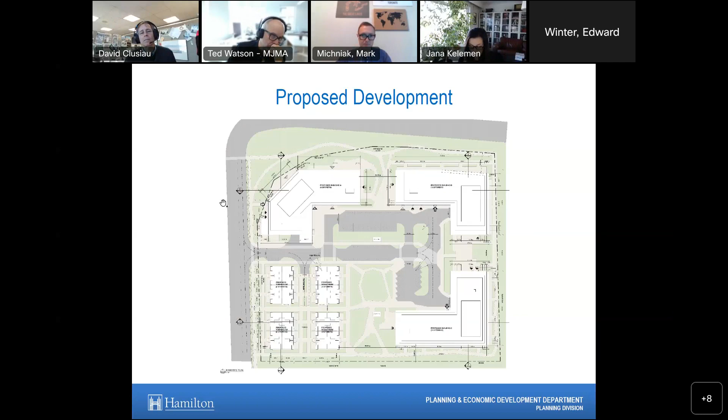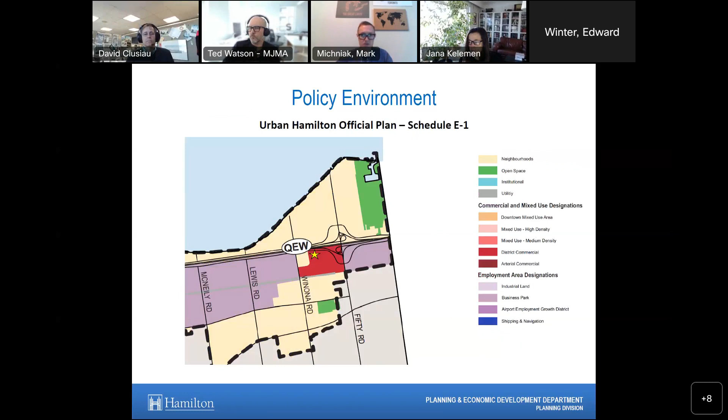Now I'm going to go through the policy hierarchy for this property, starting with the official plan policies. The subject site is designated neighborhoods on Schedule E of the Urban Hamilton official plan, and is designated district commercial on Schedule E1 of the official plan. In addition, this site is located within the Winona Fruitland secondary plan and is designated, again, district commercial.

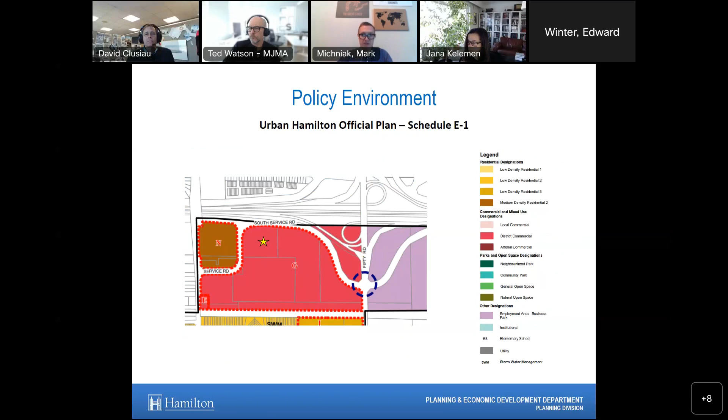District commercial areas are intended to serve the daily and weekly shopping needs of residents in the surrounding neighborhood. They serve as a focus for adjacent neighborhoods by creating a sense of place. And as these areas expand and redevelop, they are anticipated to create an improved street presence by bringing the stores up to the edge of the street.

The urban design policies in the secondary plan promote, among other priorities, attractive pedestrian-oriented environments, high quality of design, compatibility between land uses, and the protection of escarpment views.

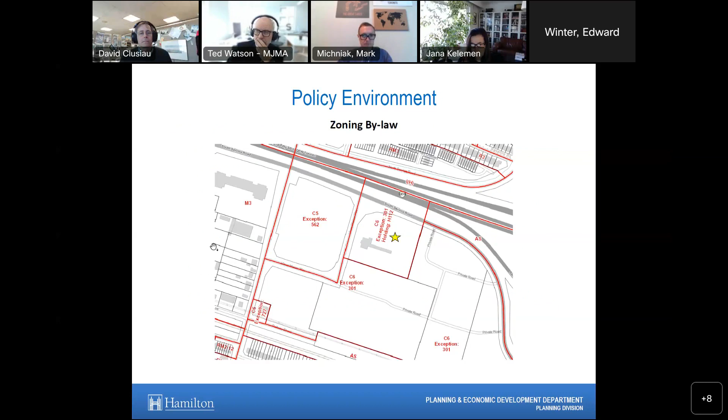Staff would ask the panel to consider the following areas of discussion when contemplating the design proposal. Is the proposal compatible with and does it enhance the character of the existing environment and locale? Does the proposal organize space in a logical manner through design, placement, and construction of new buildings, streets, structures, and landscaping? Does the proposal create high quality, safe streetscapes, parks, and open spaces that encourage physical activity and active transportation? Does the proposal contribute to the character and ambience of the community through appropriate design of streetscape and amenity areas? And finally, does the proposal respect prominent sites, views, and vistas in the city? Thank you, and that concludes my presentation.

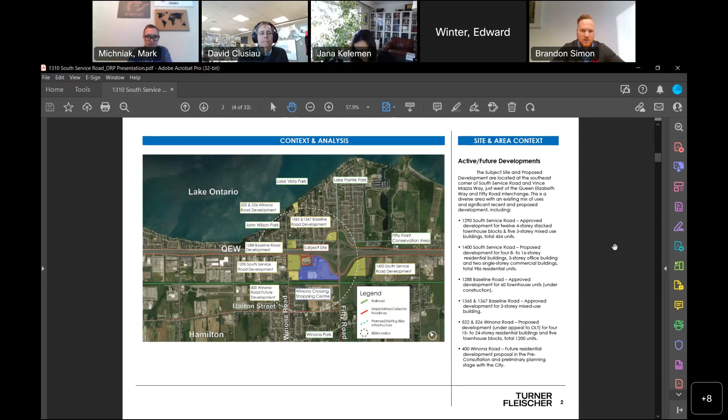400 Winona Road, just to the southwest of the site, is actually owned by the same owner as the Winona Shopping Center, but is proposed for future residential development in the preliminary stages. And to the east, at 1400 South Service Road, there's a proposal for 8 to 16-story residential buildings. So there's an influx of residential development proposals both south and north of the QEW.

Looking closer at the site and the adjacent retail plaza, the site was previously used as a freight truck service station, so it had a restaurant, a gas station, and a motel. Those uses ceased in 2012 and were largely demolished in 2014, though there are some remnants in terms of paved areas and signs and things like that.

Also included here are some photos of the adjacent shopping center, known as the Winona Crossing Shopping Center. It's been designed as a traditional shopping center form, but it does include a relatively robust pedestrian network with sidewalks throughout.

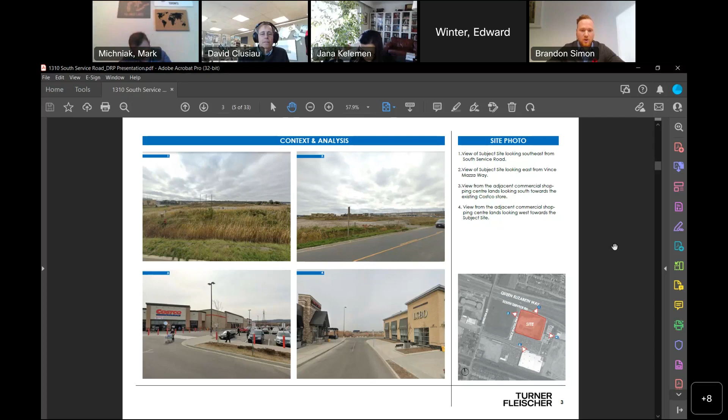Today, the Winona Crossing Shopping Center has already been developed for approximately 320,000 square feet of commercial space, with another 50,000 square feet planned on a few of the remaining pieces of land within the shopping center property. It's important to note that the 320,000 square feet I mentioned already surpasses what the city's official plan typically plans for in terms of the concentration of commercial space within district commercial centers. So it's already fulfilling, and perhaps exceeding, what is typically seen in terms of concentration of commercial space in district commercial centers.

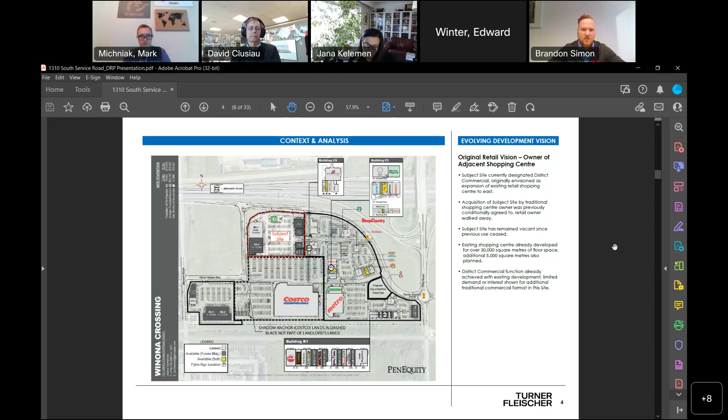When the applicant acquired the site in 2021, they too originally contemplated a traditional commercial development on the site as shown here, but that was also determined not to be viable.

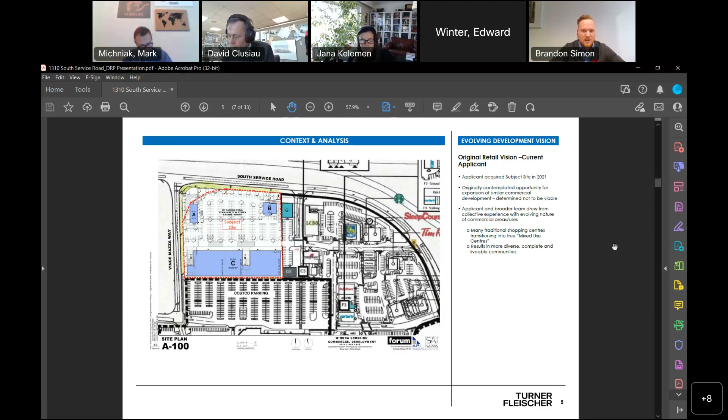After that, the applicant and the consultant team drew from our collective experience related to the evolving nature of commercial areas, in particular the trend of traditional commercial centers evolving into mixed-use centers with higher density residential development, leading to more complete communities with a diverse mix of supporting and mutually complementary uses.

So building on that understanding and experience, we've developed, in tandem with the applicant, a new vision for the site focused on a mid-rise, medium density form of development that will support planned transportation improvements in the area. Creating a pedestrian-friendly environment is a top priority.

Providing an appropriate mix of uses that includes complementary commercial and institutional uses will serve and complement future residents, as well as the larger scale commercial uses already in the area, while incorporating an expansive landscaping and outdoor amenity program to support that pedestrian-friendly environment and encourage pedestrian interaction.

This vision tries to capitalize on the site's unique attributes, which include its proximity to that large shopping center, offering a wide range of services future residents can take advantage of.

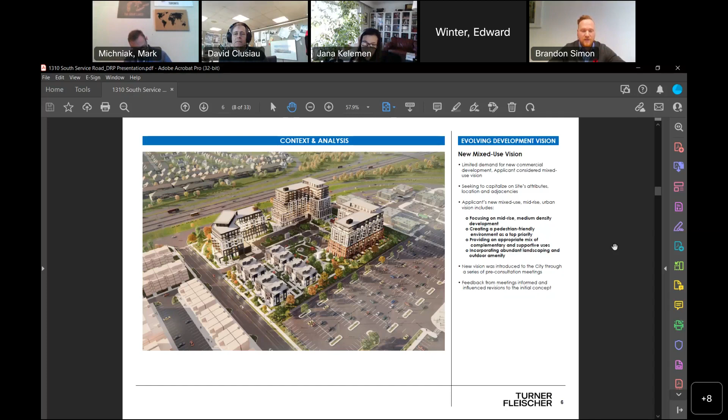The site's generous separation from lower density neighborhoods to the north and south helps mitigate any concerns related to shadowing and views. Also, the influx of new residential development proposals in the area is bringing incremental improvements to the active transportation network, which I'll get to in just a moment.

A key focus in the design of this development was how it fits in with this emerging context. We've tried to carefully design the proposal to fit into that context, with improving connectivity as a focal point.

As part of this new proposal, we're proposing a new sidewalk along the east side of Vince Mazza Way, to expand the pedestrian trail along the south side of South Service Road, which is proposed as part of the development to the west, and to provide multiple connections to the adjacent shopping center.

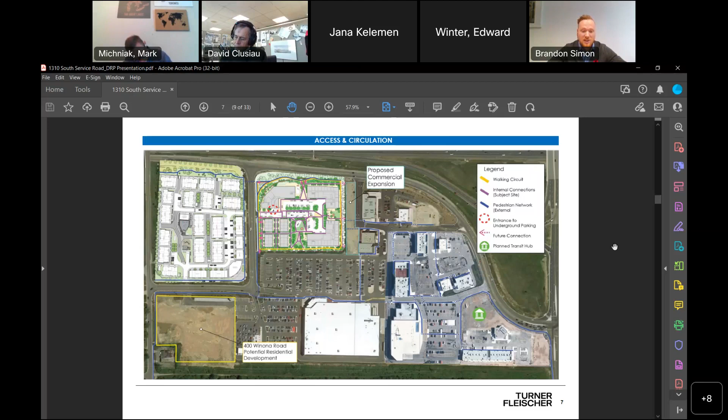These connections would feed into the existing pedestrian network there, as well as the planned transit hub located in the southeast corner of that plaza, as indicated on this map, and also include opportunities for additional connections to adjacent properties if they're redeveloped or changed in the future.

I won't rehash this too much since Mark's already been through it, but as he mentioned, the site is currently designated district commercial, and we're proposing to redesignate it to the mixed use medium density designation to permit the development.

In terms of the zoning, as Mark mentioned, we're proposing to amend a few provisions related to setbacks from the street and the adjacent commercial property, as well as the maximum height of the buildings, in order to permit that mid-rise form I mentioned.

And with that, I'll turn it over to Russell.

Thank you very much, everybody. It's actually great that we've had the opportunity to work on the site and its transformation to a mixed-use development. Next slide.

So just going over the site plan — I guess, Brandon, you haven't left me with that much time, so I'll try and move through it relatively quickly.

The idea was to create a strict street frontage along the South Service Road, along the QEW. Similar to the intention of bringing the retail to the street frontage, we brought the residential buildings forward, with the building on the northeast corner at 12 stories creating a very strong transition.

Not only do we terrace the building, but the corner building is designed at 8 stories, working through the scale of the project to create a connection and a reduction in scale to the proposed buildings on the west side of Vince Mazza Way.

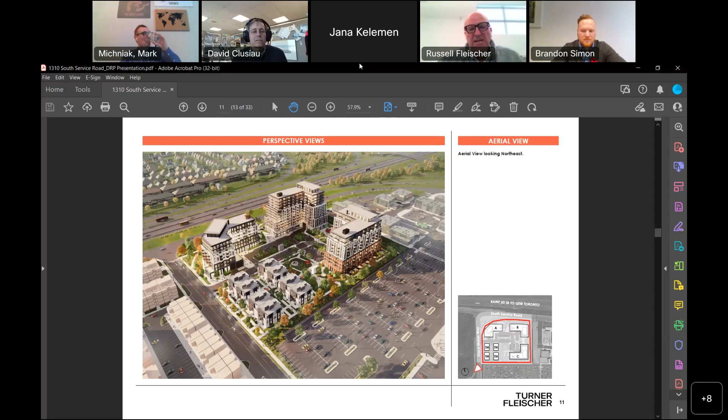This is a view looking northeast towards the corner building, and this is the lowest of the buildings that we created.

We create a very strong 3-story base and a further step at the 7th story where we start terracing it. There's a terrace at that higher level, using materials which relate to the residential and to the emerging surrounding community.

Along the South Service Road you can see the intense landscaping where we provide access and pathways that encase the whole site. You can also see the larger scale building on the rear, which is 12 stories, but articulated to relate to the other buildings.

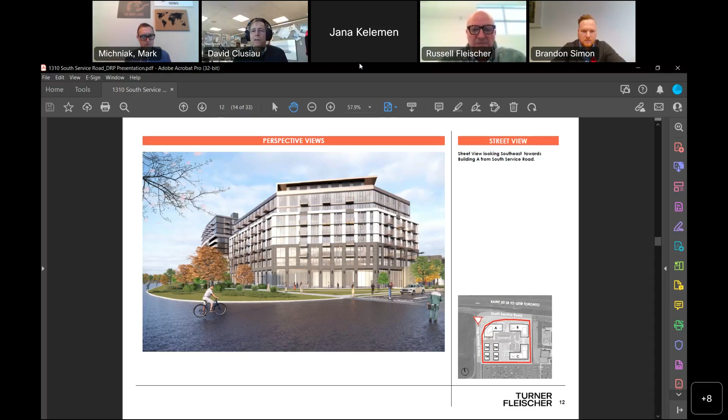Russell, I'm running a bit over time. Have I got a few more minutes? Okay, you better go through these quickly.

This is the relationship of the townhouse to the corner building, showing how we're dealing with the street front along Vince Mazza Way in an interesting way, creating public and private relationships with a mix of materials that relate to the other buildings.

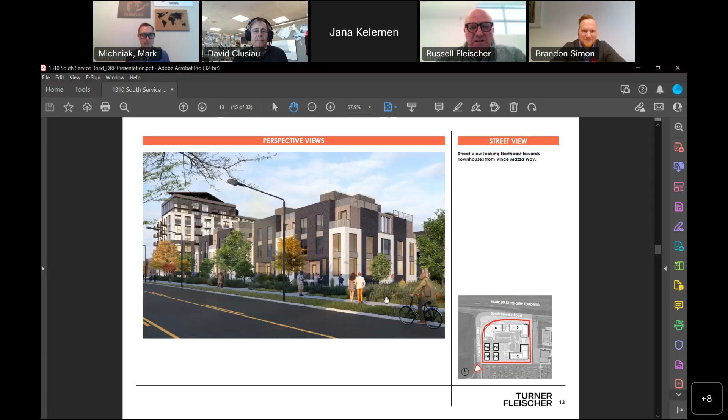This is a view looking towards the southwest, showing the relationships of the buildings, the step-ins, and how we're dealing with the corner, articulating and playing with the balconies, creating fun facades with a strong base element and a top element that relate to the scale of the surroundings.

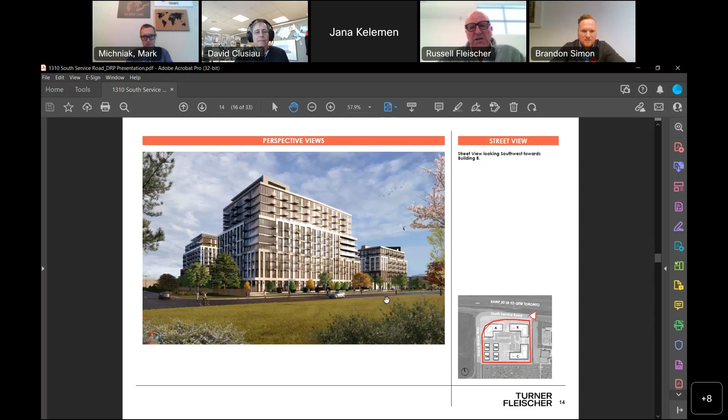We're also playing with brick colors, not only articulating different materials on the building but different colors as well, to reduce the scale of the development and identify each building in its appropriate position and relationship to the others.

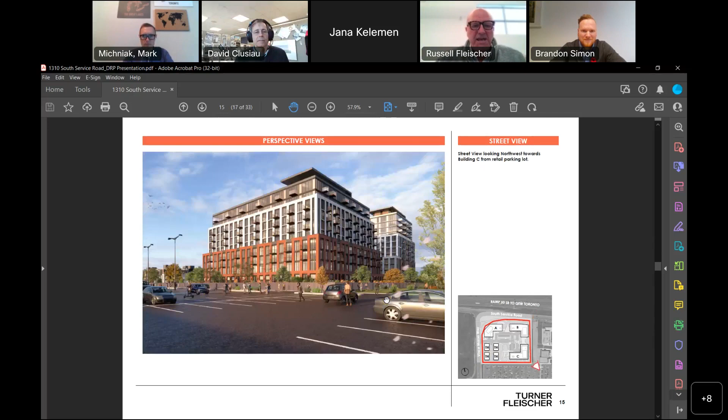A close-up showing how the ground floors are very much articulated, working with the public realm we're creating, and how the terracing works above the 4th story at the 5th story, giving a definite definition to the built form.

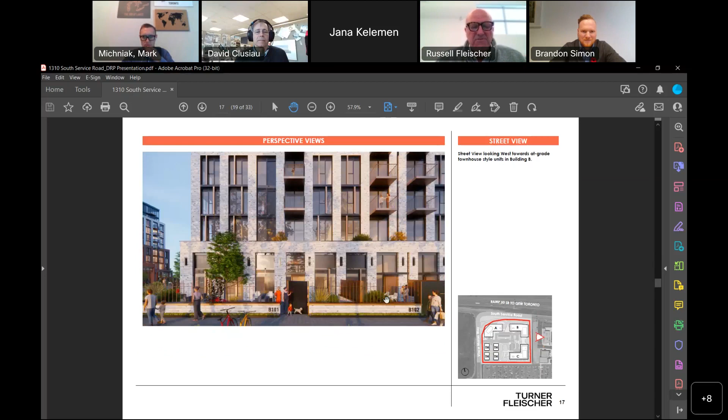It's similar for the other building as well, with a lot of emphasis on the ground plane and private and public amenity space.

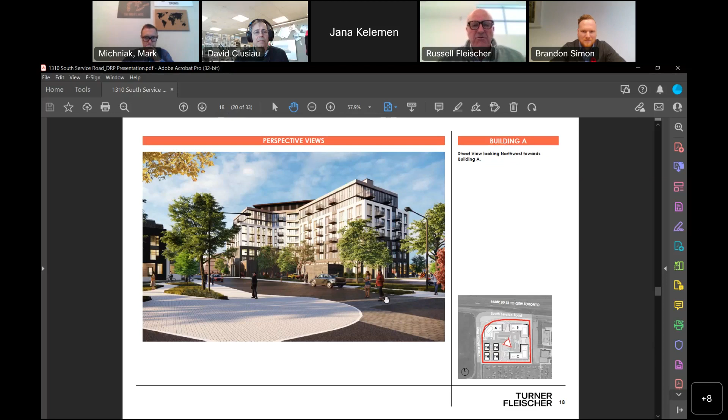How we're dealing with the ground plane: the intention is it will be phased, and the corner building on the northwest corner will be the first one. We've located the ramp to the underground in that location, so we're trying to get everybody off the streets in terms of vehicular access, creating more of a walkable community internally.

On the north side, between the buildings, we're creating special public or semi-public private spaces that relate to the amenities shown in blue, with internalized loading in all cases, to make this whole environment very friendly and public with different experiences and amenities, which you'll see in the landscape drawing.

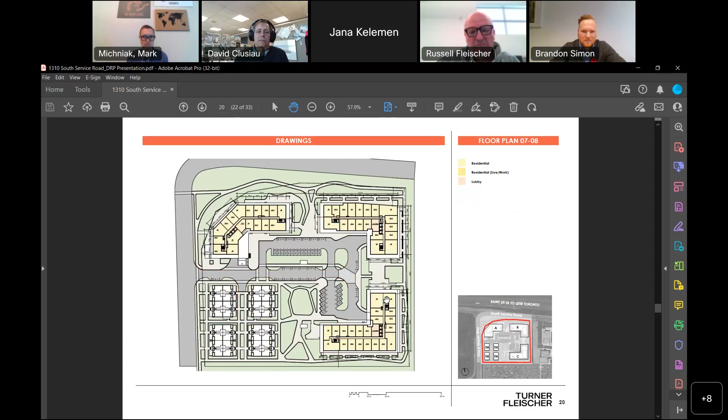Some of the upper floors, where the building steps up, and then getting into the landscape plan.

You see the trail that runs all the way around, which we call the walking trail or connection to the trail system, with intense landscaping continuing that natural landscaping on the south side, dealing with the frontage onto the commercial to the south.

Different experiences with residents' gardens and kids' play areas make each area special, including something on the south relating to the townhouses. Within the townhouses there's a great mews area with private and public space, some parking to support the retail and visitor parking, and outdoor barbecue areas.

Everything has a strict pedestrian connection to the buildings, to Vince Mazza Way, to South Service Road, and to the commercial plaza.

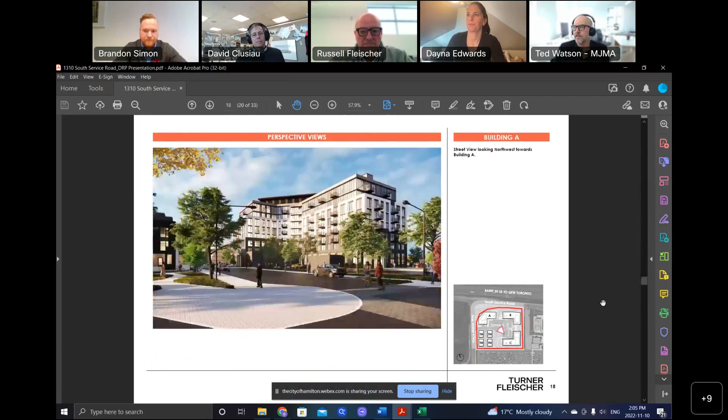Okay, thank you. A related question: on page 20 of your document, there's a fence that seems to be a pretty sizable two-meter fence running the perimeter, at least on the south and east of the project. Whereas in some of the renderings there are low fences, and the landscape plan also identifies fencing. Can you tell us about that? Is the intent to actually wall off this structure or courtyard space and disallow movement into that courtyard space from, for instance, this view?

Go ahead, Russell. The intention is to create a screen against the Costco parking lot, which wraps around the south end of our site, and it depends on the adjacency. There's a new building proposed on the south as you go around this corner, on the southeast corner there. So that's the intention of the fence.

Probably a bit of a misconception on the rendering here, but from the space between the two buildings, our 12-story and our 10-story, the intention is for a strong connection through the plaza, linking through to the South Service Road. Okay, thank you.

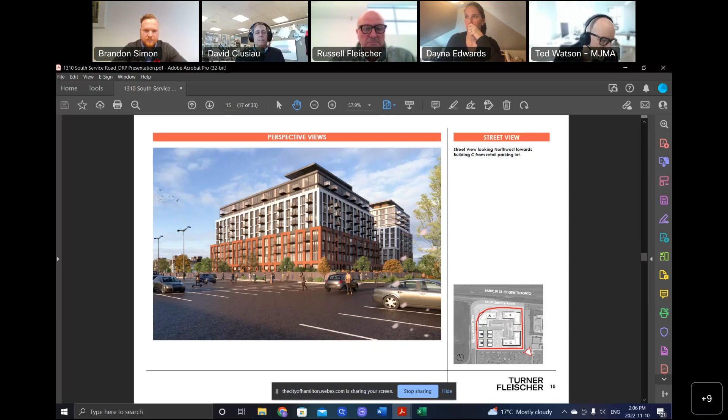And the last question: on the landscape plan, I didn't see identification of how the trees are to be detailed, and clearly the entire site is below grade parking. Do you have details that will allow those trees to grow to the canopies you're showing in a healthy way? You're correct that we haven't detailed that as of yet, but what we are proposing is some significant play in terms of topography.

There are some contours shown, starting at the north end along South Service Road. We're looking to incorporate some kind of landscaped berming, which has a dual function of adding additional noise screening while also adding visual interest for those walking along the trail. It also provides an enhanced ability for soil depth and soil volume, which is what you're getting at with your comments. We haven't submitted for site plan yet, but at that stage we'll have to detail how all these trees will be provided with sufficient soil volume. The intent along the north and central areas is to work with topography so we can have built-up areas with more native soils available to support the trees to their full growth.

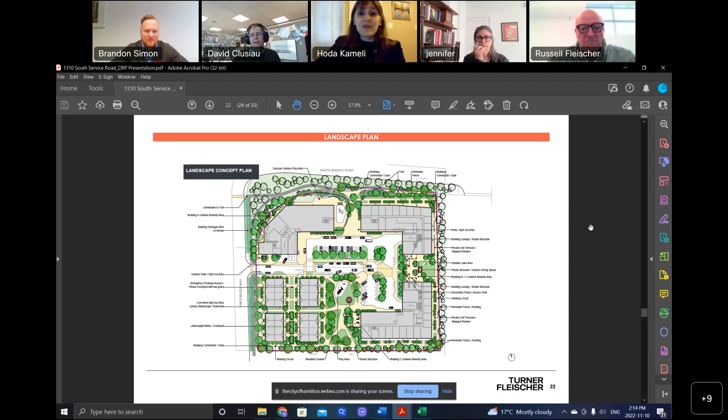I was just wondering, because at the south side it's just a fence between the parking lot and the right of way. That's why we're trying to screen that area, you know, we can relook. It's not screening for sure, having the parking lot, but it's the same language, having the private parking, then having the public parking. I was wondering maybe that could be an option, but that's why I asked, have you studied, have you tried? Because you were talking about the access to the underground parking, and there are several aspects to it.

We're running a little on time, so I think the questions really should be clarification, and maybe we can move on. Do you have any other questions, Hoda? No, I'm good, thank you. Jana? Sorry, I was muted, no questions, everything was answered, thank you.

Okay, I have just two questions. One is, do you have a sustainability agenda on this project? I may have missed it in your documents, but do you have some sustainability goals that you're aiming to achieve on the project?

What we're doing at the moment, the intention is to meet obviously the Ontario Building Code. We haven't looked into going any further than that at this stage, so we'll be reviewing that together with our clients as the design progresses.

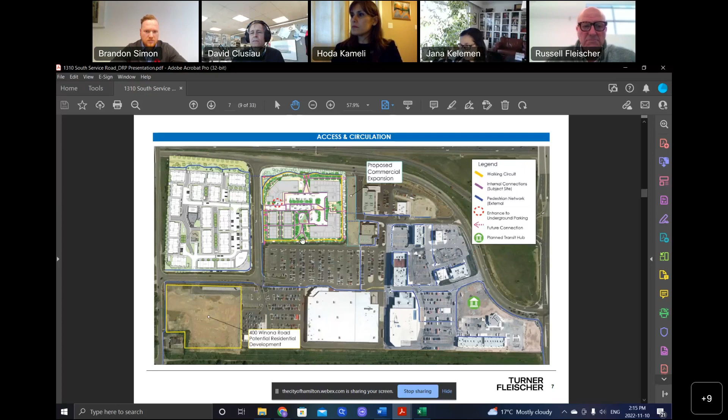Okay, you made some minor changes to your setbacks. What is driving those small changes? I think the biggest thing is this corner building. As you can see, the property line jigs and jogs quite a bit. So in that corner on the westerly portion, we get relatively close to the property line. It's basically site configuration and trying to create somewhat of a pure building form.

And there's a lot of setback, and the boulevard's really huge, so we don't see that as an issue. Okay, I just wanted to understand the specific location if you could. That's the biggest one, and the other is along the southerly portion, where we've got bigger setbacks. Again, in small areas we're getting closer as well, but generally we're meeting most of the requirements and we've got fair setbacks everywhere.

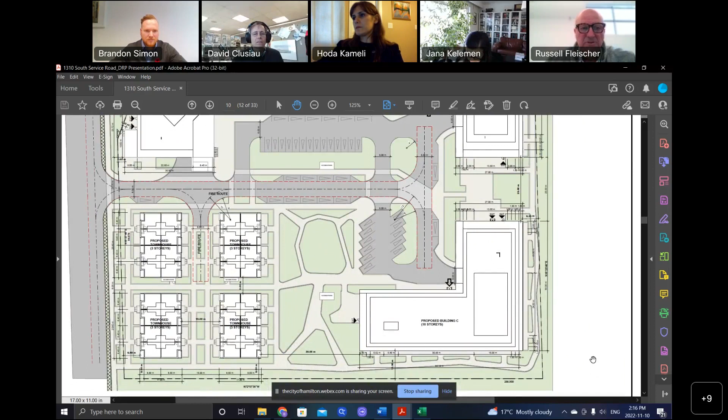Okay, I'm going to turn it over to the panelists for commentary, and thank you for your presentation. So the first person is Jana, I'll ask her to give some feedback.

Hello, Brandon and Russell, I just want to say thank you. That was a really well thought out and detailed presentation that mimics the well-detailed design work that you guys have brought forward to the panel today. I do really appreciate this proposal and the fact that you've really thought about the urban condition and bringing mixed use and residential into what is otherwise a more suburban shopping center. I think that you've put a lot of design work in.

From my opinion, my particular strengths to this proposal are the private amenity space for the ground floor units, how the ground floor units address the greater proposal, as well as the interior private amenity space and park area that you've designed as part of this development.

Some of my concerns, or some of the things I wanted to bring forward for further discussion or design work, is the surface parking that you have internal to the site. I'm wondering if it could be either scaled back, or if some of the angled parking can be removed, as I just wonder if that's a little bit odd and awkward as it kind of encroaches onto the amenity area, but also just in terms of safety, in terms of people entering and egressing from angled parking spaces.